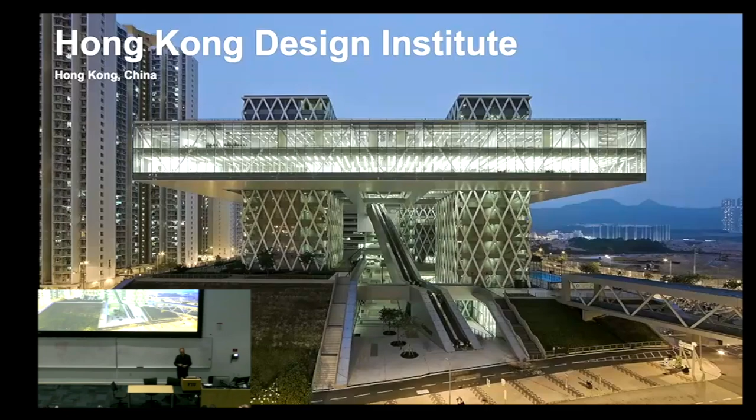They launched an international anonymous competition, which means that everybody can compete if you have the degree and your license, but it's open to the younger generation as well as some very mature firms that also like to compete on this very interesting project. As we were rather young and had nothing to lose and no fear in this first kind of big potential project, we were really interested in looking at the city fabric.

We looked at what makes Hong Kong a fascinating megalopolis, but also at some of the disadvantages or dysfunctions, to create a place that could be influenced by all those parameters.

Hong Kong is a very dense city, and in some parts also has a beautiful landscape around it. It also has a very interesting city fabric, which is very vertical, but also has some low-key pedestrian-feel architecture in some market areas. We felt that all those elements of space in Hong Kong are not really coming together—they are often in different parts.

We felt we should define a campus of design that should be influenced by some of the urban devices of Hong Kong, so it would feel like a Hong Kong building, but at the same time enrich it with what we can bring as architects to add more value.

Some of the ideas were, as I was saying, Hong Kong is a layered city. You have gardens, you have the cars—actually the level of the street is often for the cars, and there's another level above for the decks, which are sometimes the ground floor of vertical condo buildings. And then you have beautiful gardens in other parts of the city that are more like British-style design gardens, but not gardens that are really felt or used by the people.

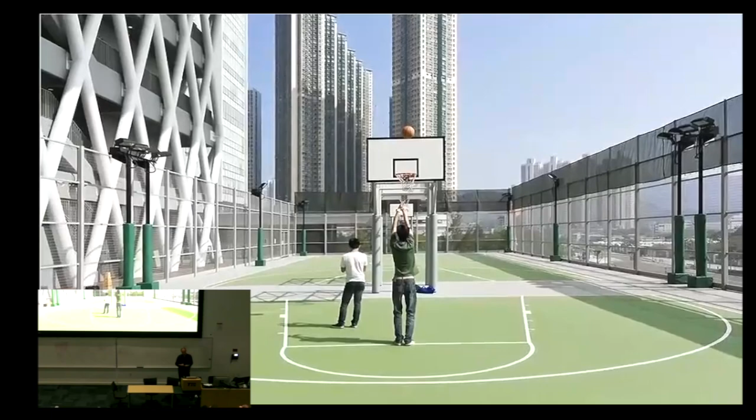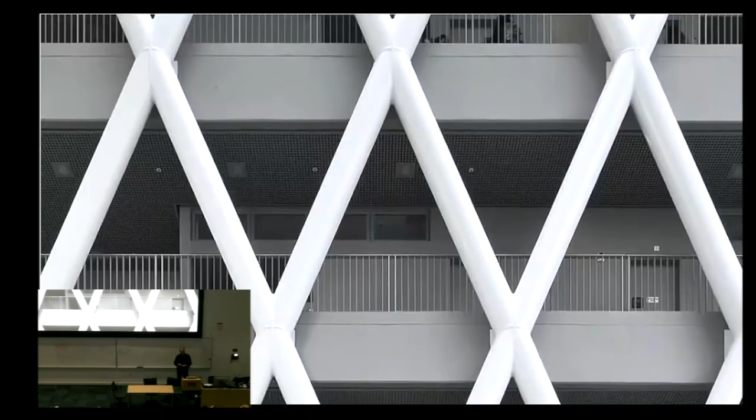And from this concept, this simple but quite universal idea, we transformed it into a building that became a kind of canvas for multiple situations. We started to introduce what we still believe today in 2025, which is a kind of motto in our research and our work: that cities need space for interaction, what we call social spaces, in order to provoke multiple encounters, provoke culture, provoke surprise, provoke the unexpected, but also a building that can relate to the city and be an extension of the city.

We believe that architecture should be influenced by urbanism more than the contrary, that urbanism is a place for architecture to interact with the past and the future.

So this building for us was the first attempt at creating a new place that feels like a Hong Kong place, that connects the different worlds of the city and nature into something more interweaved, not layered or stacked, but working together in a coexistent way, by introducing a garden that is not just a podium, but has a unique plaza with a center part that can be a place of encounters.

Then we like to play with movement in space, and we believe that stairs and lifts are also places of observation, places of encounters, places that should be used in a much more narrative way than just a functional way.

If you look at Hong Kong, which is a very hilly city, some parts of pedestrian displacement are made using those travelators that climb the hills. We played with that and implemented it into our building to create something that is a kind of hybrid of Hong Kong within it.

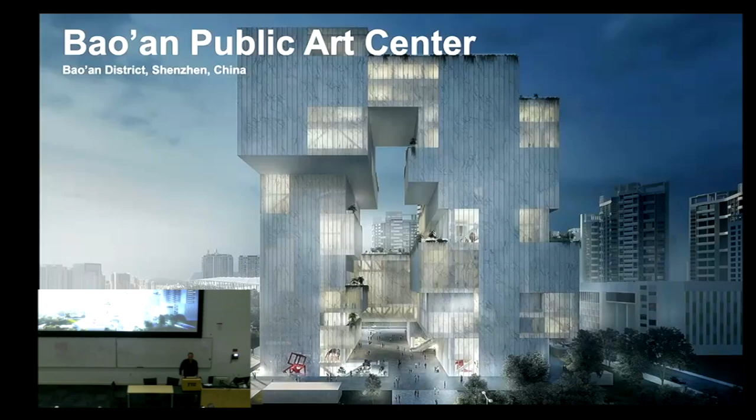To end a little bit about this first project, in summary, what was very rewarding to us is that last year Chanel, the French luxury brand, chose the building without knowing it was designed by French architects. That's not the purpose, but we were super happy to hear they selected it to do their latest fashion show, and to see how the building interacts with the city, because it is now an urban piece of Hong Kong, very vibrant, and after several years of occupation still becomes a place of destination that is more than just a building or a design school.

The next example I want to share with you is another cultural venue we have been designing, which we are going to complete in 2026. It's called the Bao'an Public Art Center.

It questions the idea of what a cultural institution should be in the future, something that is not an elitist place only for people who love going to museums, but also becomes a public place of interaction and multiple encounters. So it's almost maybe 8 years after we designed the first building, kind of a second extension or second part of this research into creating spaces that allow multiple activities.

As an architect, you don't choose your site, unlike in school where sometimes you can choose your land for a dream project. In the real world, you're given a situation that is often an open space left for public buildings to become a new addition, a new piece of equipment, a new infrastructure for a new district.

In this case, it's in Shenzhen city in China, in the district of Bao'an, which is a kind of recent district with a new airport. In China, they are fast-tracking the implementation of new cultural institution infrastructure to give civic places to the districts. But the question of what this kind of destination should be was raised to us.

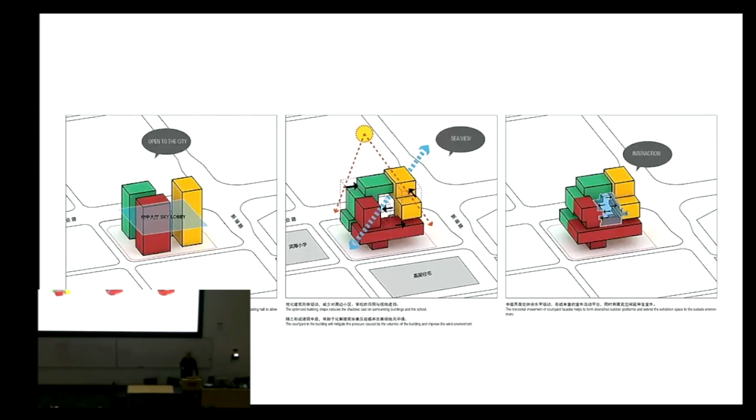So, for example, in this diagram, we chose not to stack or put the program side by side, but to use the site to give back some space that we're taking from the city, implementing a porous building with multiple layers of plaza and gardens that occur not only on the ground, but also on an elevated level, creating a kind of bridge in the district.

Those are pictures of the typical Shenzhen situation, a new city, 20 years old, very modern, very glassy, big, lots of cars, and how to create an institution in this kind of environment, where we learn at school that a cultural institution is a more weighty, heavier kind of building that sits in the city as a beautiful landmark, but also makes you feel the weight of the past, the weight of culture, which is really difficult to duplicate in a very new city like Shenzhen.

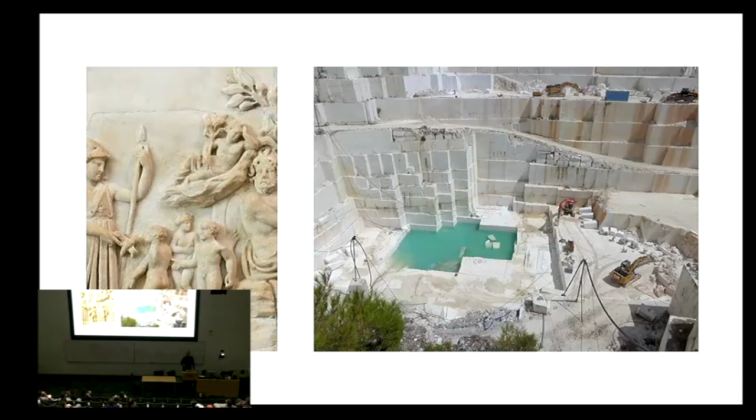But somehow that was kind of an inspiration for us, because we said, maybe we can do something new, something in between, not a pastiche, but something new which plays with those elements.

So we were influenced by the idea of quarries, marble quarries, thinking maybe we can do something that looks like stone but push it to another level, to carve the stone, to create a place of interaction where the city continues its journey through the building, and use another material, glass, to express new ways of working with the environment — opacity, semi-opacity, transparency.

And we turned this into the idea of creating a building that is not only not a frontier, but breaks the traditional enclosed museum typology to create an open dialogue with the city, making the building some kind of living organism, which we imagine like a carved marble block.

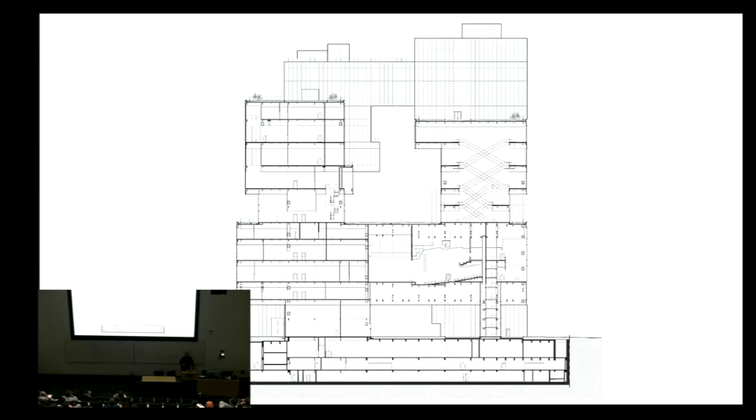So again, getting from the concept to the reality is a long journey, but it's something we strive for, to keep this big idea so people can buy into it and really feel belonging to it, enriching the city with those kinds of parameters.

This is allowing us to make architecture again much more than just a simple building or a beautiful piece of design, but allowing us to propose different ways of experiencing the city.

And again, you can see the place that we took from the city with this human plaza on the ground, becoming a city lounge with some trees.

We decided to elevate the access of the museum into what we call a sky lounge, a sky lobby. This allows people to go to different places in the building, so it looks really alive at different levels, not only as a typical typology where the ground floor is activated and sometimes a rooftop is the place everybody wants to go. We like to create something that is much more vibrant.

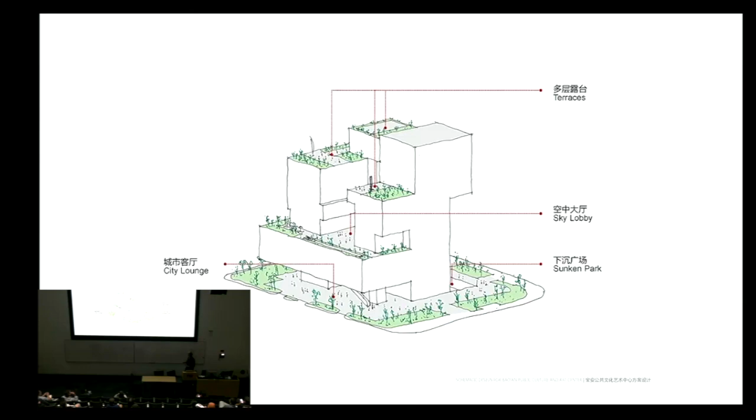So, going again from concept to reality, transforming this into a piece of architecture, a physical material, to make a glass building look like marble without doing a pastiche. We liked this idea because Shenzhen has a very glassy building, glassy atmosphere.

So we went to a marble quarry and took some photographs of it, mapped them, and enlarged the scale to make it adaptable to the size of the building.

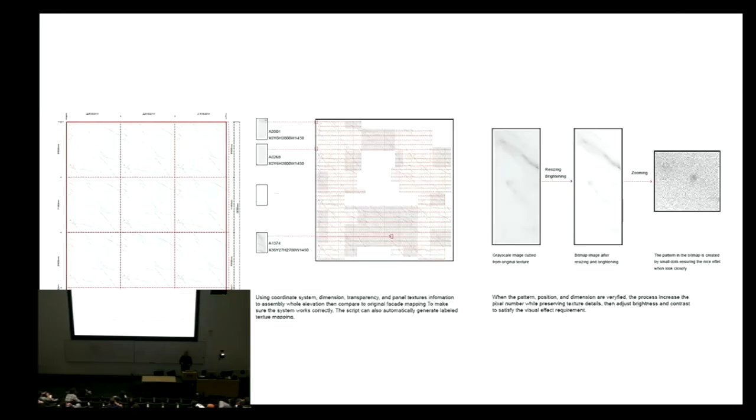And by doing this, we could push the idea of creating a pattern with a more sensitive look when you want transparency and opacity, which is actually very difficult to achieve with a piece of stone. Again, to enrich it, to make something that I think is also the beauty of architecture — that it can always experiment and create something.

You learn from what has been done. You try to create something new by learning from the past and trying to push a new idea.

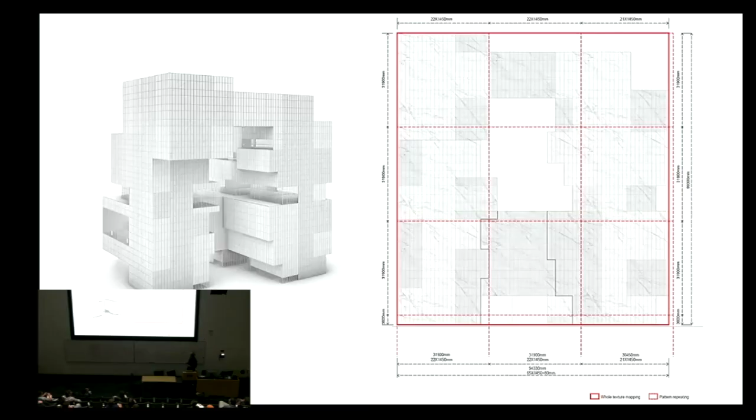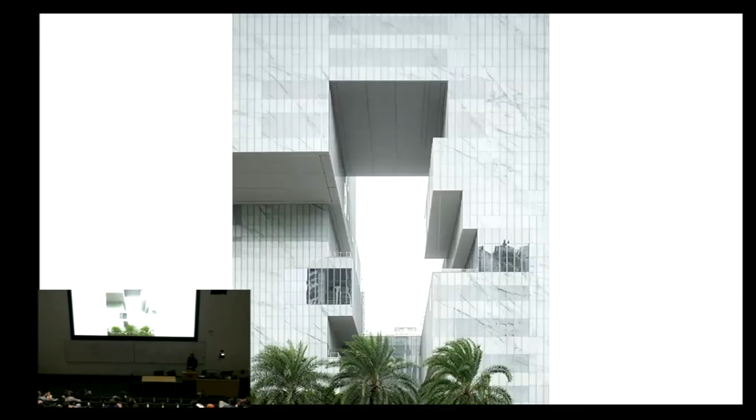In this particular case, we did all this research and finally found the right scale so we can read the veins that you cannot read at the scale of such a huge building, but also allow the transparency we were looking for, to see people in the building and not people behind a wall. Those are pictures of the facade being completed, dated three weeks ago.

The building starts to create this kind of original pattern in the city, a sculptural building, but in a way with a purpose. It's not a sculpture for the sculpture's sake—it's for getting the lighting, getting multiple terraces, and creating a destination that is very alive and very sensitive to its environment.

You can see in the transparent parts there will be the theater, shared by the city or used by the city for plays and performances. Here is the building as it is today, and in the next months we will have the landscape starting to climb and inhabit all the multiple terraces that you can see here on the volumetric.

Next project is one we won about... 20 minutes, Adrien. I'm already at 20 minutes. Is it okay?

The next one I want to share is also very interesting because it's very different again, and that's what I like to share with the School of Architecture—that in the different patterns or different cultures of the city, you can create your path through to invent something exciting, or at least we attempt to.

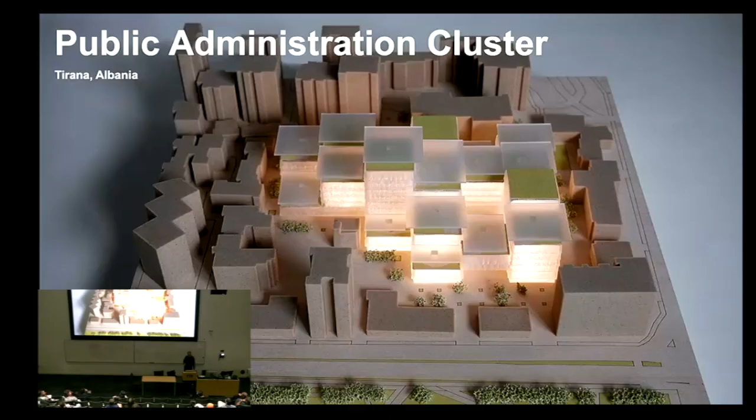This is a public administration center cluster—a government building for the city of Tirana in Albania. It was a big international competition, and maybe what is particular about Tirana is that it's a booming city, a booming country.

But with a very strong political statement that architecture and culture should be an anchor point of the future of society for Albanians, for everything they have lived through. He really believes in it, and he likes architecture to push ideas.

In our case, the site for this government building is in a very dense situation of Tirana, and quite chaotic—a lot of cars, noisy. Buildings are very free, and it has a certain beauty, but at the same time, the city needs a certain clarity, less cars, and more place for pedestrians and social interactions.

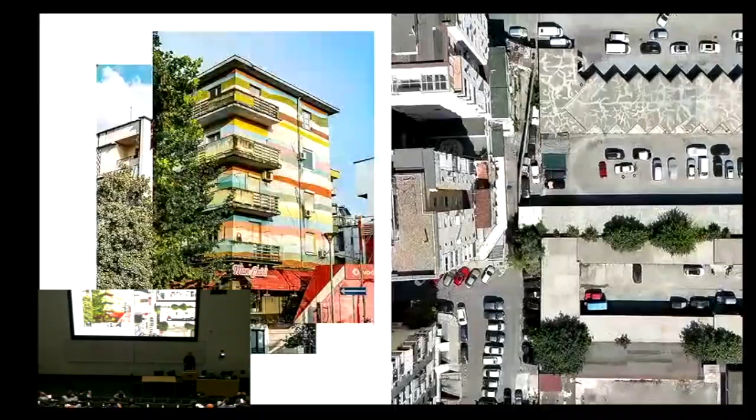So it was our first project in Tirana, and the Prime Minister said to the architect, please do a building that you wouldn't do somewhere else. You would do a building that relates to the city fabric.

I don't want something that you have done somewhere else. I don't want international architecture—of course all the architects are contemporary architects, but we have to learn from what we see and enrich it somehow.

So there is a strong pattern, which is interesting. There is a strong freedom because in recent years, people were allowed to build without any rules. So you find in the streets balconies, extensions, creating this kind of a very fun fabric.

At the same time, you have a lot of colors, street art that the government was also pushing for, to bring color into the city because it was so dark from its history. And then you have some craftsmanship, as we have in all our countries, but that you can really feel when you walk in the city.

So as architects we try to use a few things and push them in a very direct way, because you cannot have too many ideas—you have to choose the battles. For us, the city is an inspiration, and the natural environment, of course, is an inspiration.

And the colors that we found are also something that, even though we are not super used to using color in architecture, we said maybe this could be a first time we try. But we don't want to do it alone—we want to work with a contemporary artist.

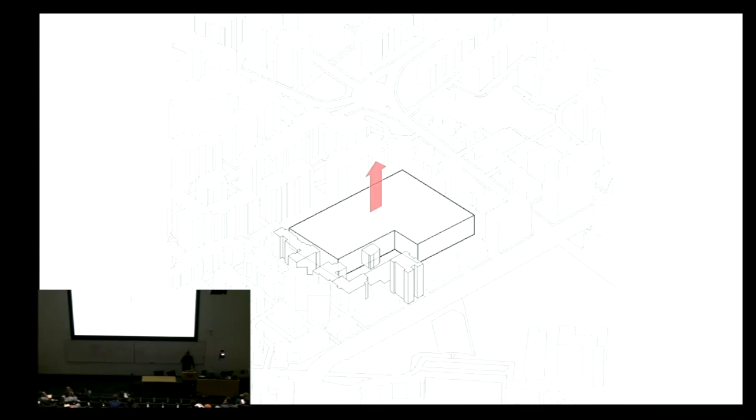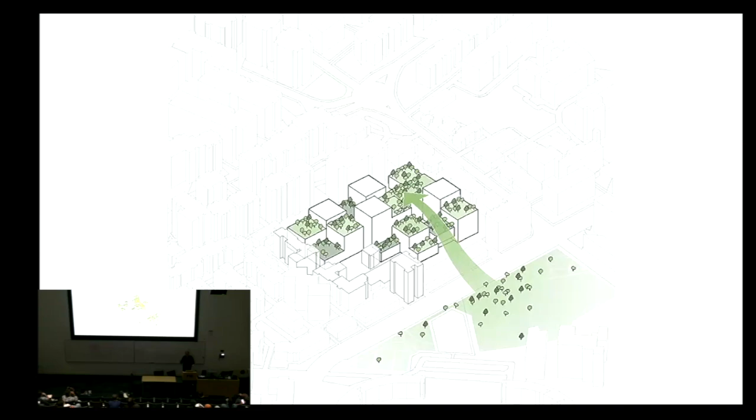So we started to extrude the block in a very simple manner. And then, because there is some green also around with a stadium on the other side, and the climate in Tirana is very hot, everybody wants to protect from the sun. We said nature and shade are going to be our friends, to create small gardens on a small scale, like pocket gardens, but also playing with the height of the building, not making one big building, but more like an assemblage, like a village of smaller buildings. We are going to create a kind of new fabric which is much more human and more inviting.

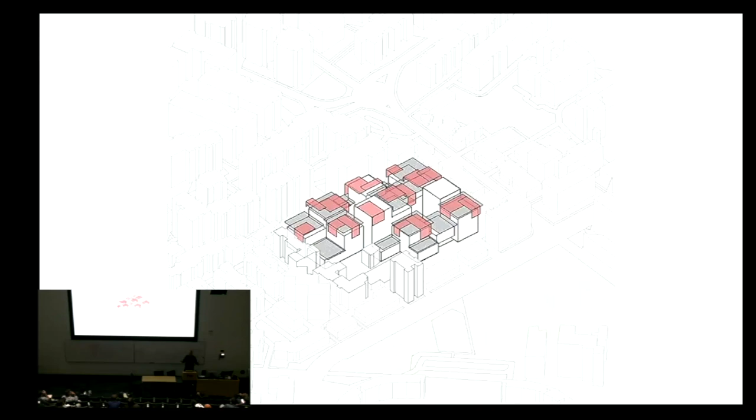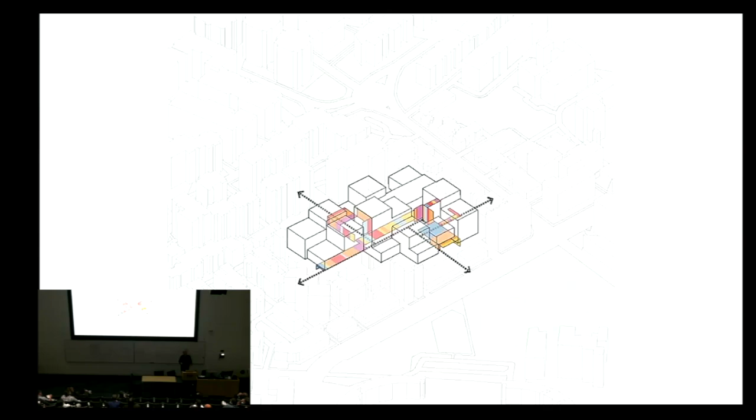And then we asked the artist, what would you do? And he said, well, what I can do is work with a new material he was using - it's acrylic rods, very funny, looking almost like candy. And he said, we can help you use that as a kind of wayfinding, or a cultural way to make your building more appropriate - or not more appropriate, but somehow give a cultural aspect to the building in a contemporary manner. So it's kind of those artistic carpets that wrap the building in many ways, and it becomes something that belongs to the building, and also a kind of wayfinding to define the pattern of the internal courtyard and bring this into reality.

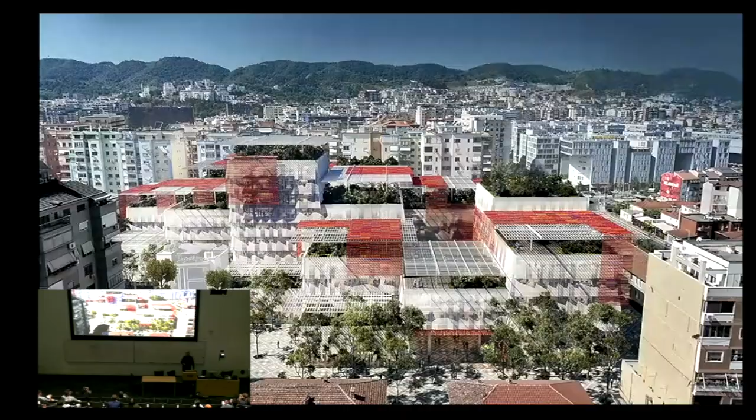Well, this is a picture of the final design that was awarded, where you see again no cars, but more like a human fabric with open patios, an invitation for people to get in, but always protected in a nice, cool kind of atmosphere, to have the breeze of the city and the shade of the city, and the color that gives this kind of sense of identity. So it's kind of the unifying thread of the project.

And then again, looking at this, of course in architecture, according to the facade, you learn how to protect yourself. You can use shade, you can use rods, you can use a horizontal line or vertical lines. And we said, maybe we can do something more playful. Looking at the skirts of these old traditional clothes, we made something that will protect the building with an aluminium kind of curtain protection.

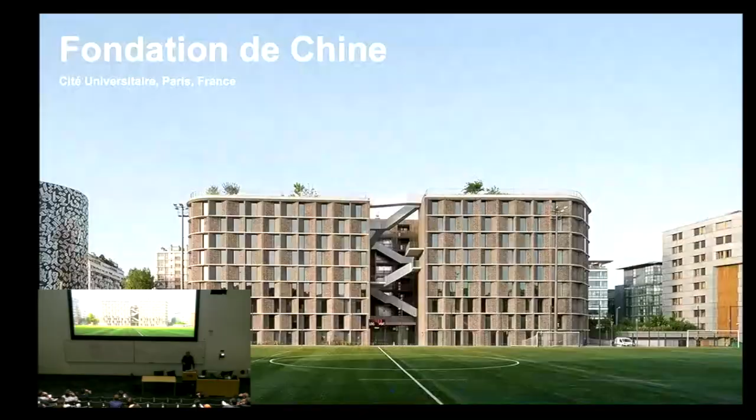Fondation de Chine. I will go much faster now.

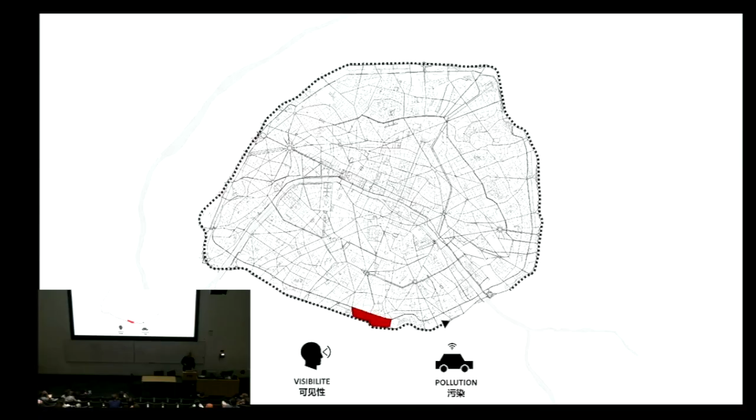Fondation de Chine - it's a residential project we did in Paris, which is kind of a dorm. In Paris, we don't have campuses like you guys have in the US. There's only one, created after World War, at the edge of Paris, which has the advantage of being very visible because it's on the ring highway of Paris, but the disadvantage of being a bit apart, with a lot of noise and a lot of pollution.

And every country has a pavilion, and some countries don't have one. We wanted to propose one, and China didn't have one. So they launched a competition, and we said, how can we create residential buildings that have a feel of Paris but will also welcome Chinese students. And also the investor is Chinese, so he wants his building in Paris to somehow represent the Chinese identity.

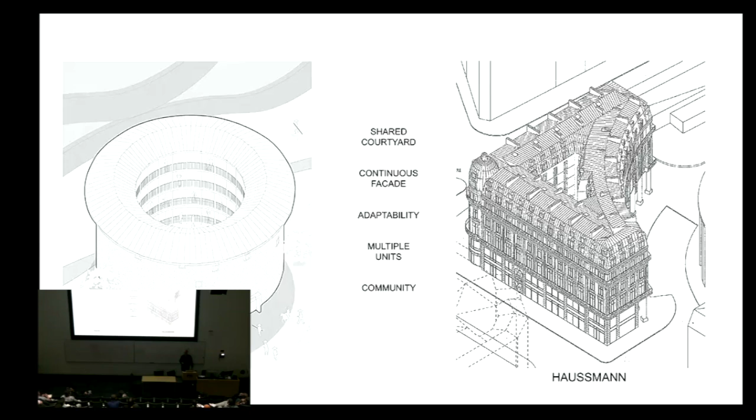So we looked at some typology of Haussmann buildings, which have some character and also a little patio, and an old traditional Tulou system in China, which has a communal space but a protective skin around it to protect yourself from battles. And we invented our own kind of fusion of these two typologies, by creating something that pushes further this idea of courtyard architecture, but open to the land and to the landscape, because we want more interaction, more generosity - we want the landscape to be not a place for aesthetics, but a place really to live, to feel the nature in, and to enrich your daily life.

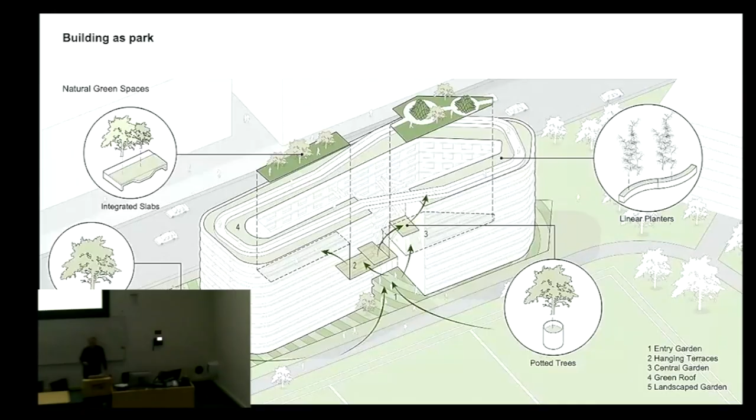So in the end, we let the nature in, and we decided that this internal courtyard will be a place of visible interaction for students to connect to themselves to each other. We invented this kind of external stair that becomes a link between the student rooms, giving access to the public amenities on the ground floor, and also going up to a roof garden.

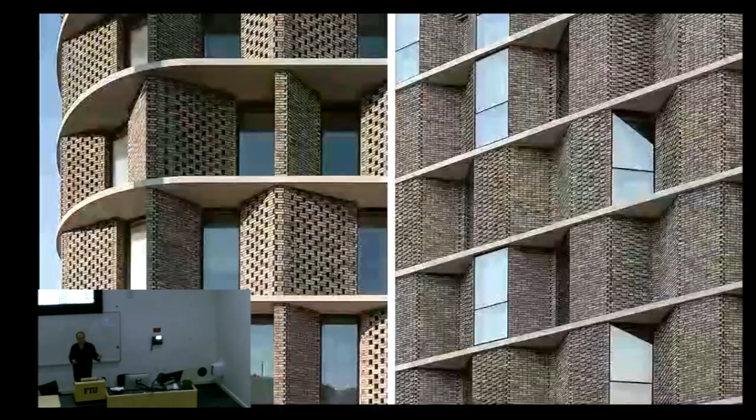And then for the building skin, we use brick because it's a kind of material that is also a bridge between China and France, used in a domestic way. And as you can see inside, we have a warmer material, which is wood, giving this feel of being in a cocoon place, some place where you feel better.

And I will finish by showing this project, but just because Henry asked me to talk about Tropicalia, and it's really another kind of typology. It's been 10 years we've worked on this project. This is a tropical greenhouse, and it's in the north part of France, so it's kind of an awkward situation to do a tropical space there.

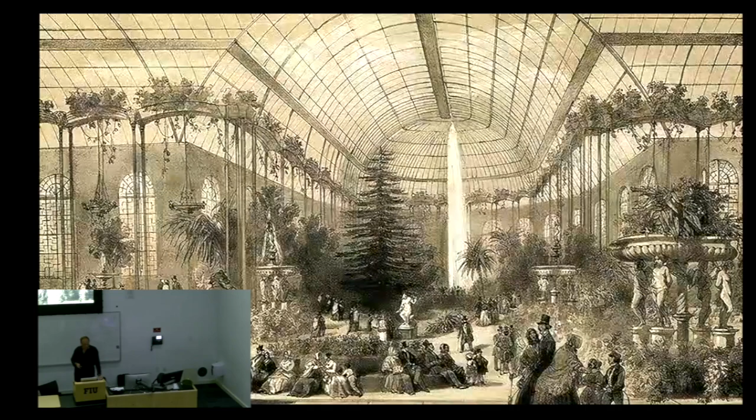So what we wanted to do, because this project aims to be an immersion in the fauna and flora, is a destination for research, but also a destination for tourism, and a destination with connections to some countries in Africa or South America, to exchange ideas and make sure people are aware—if they cannot travel and take a plane to go there, maybe they can learn about the spaces.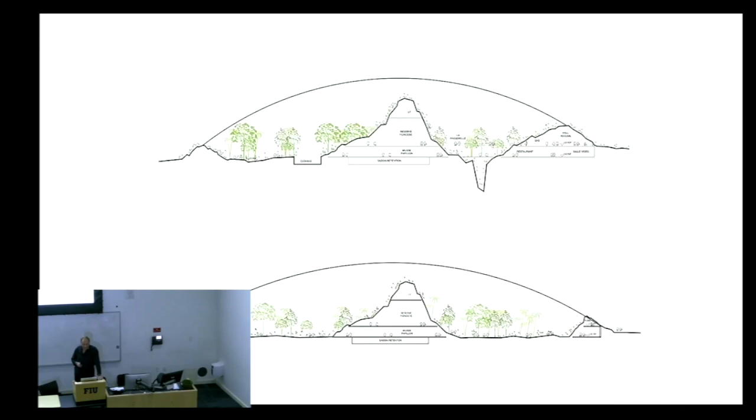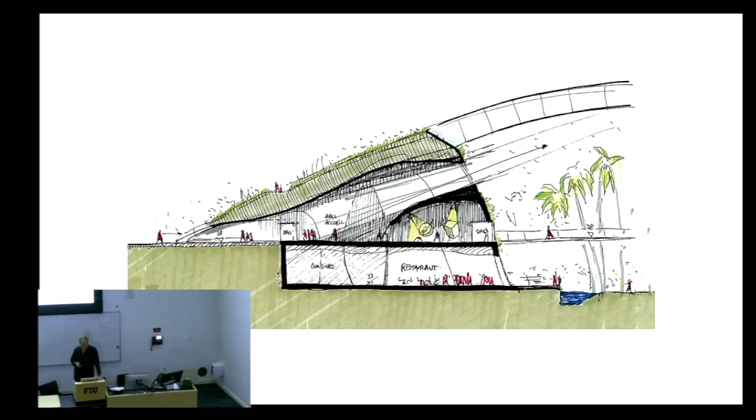So we designed a project that is an extension of a small hill, a piece of nature with a global dome, surrounded by a small ring where we decided to put all the facilities and rooms needed for research, or theaters like here to learn, and to use this little hill to create an extension of the land for people to interact with the outdoor space.

And inside we have this wild system that has a certain beauty, but at the same time can be fragile and needs very high temperature, because the north part of France is not Amazonia. Then there was a debate about architecture—are we really going to consume a lot of energy to do that, because we don't want to do that anymore? So how can we make an architecture that can produce energy?

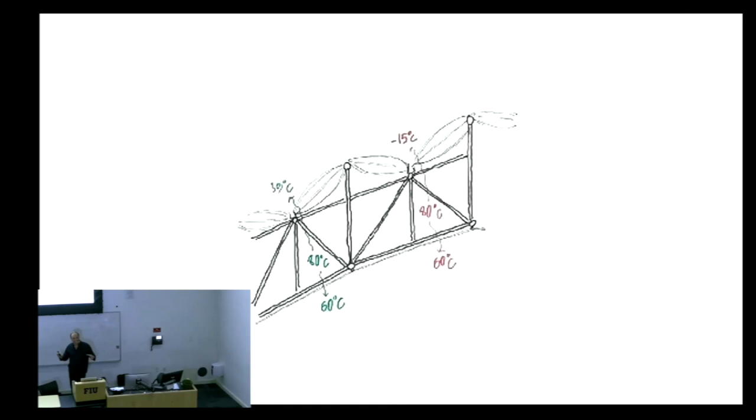So we decided to work on a scheme, a sample, a research about creating a dome that is kind of a giant heater by encapsulating all the steel structure into a double layer of ETFE. The first layer—it's not glass, it's cushions of air. Then we have about a 3-meter gap, and below that another layer of ETFE, almost like an air chamber of a bike, where all the air is heated by the sun throughout the year.

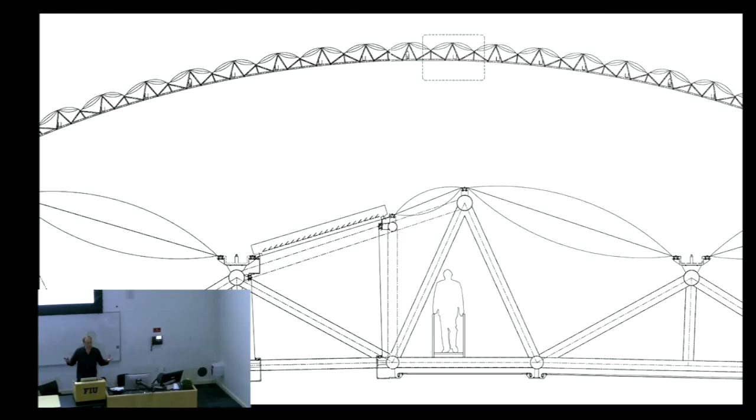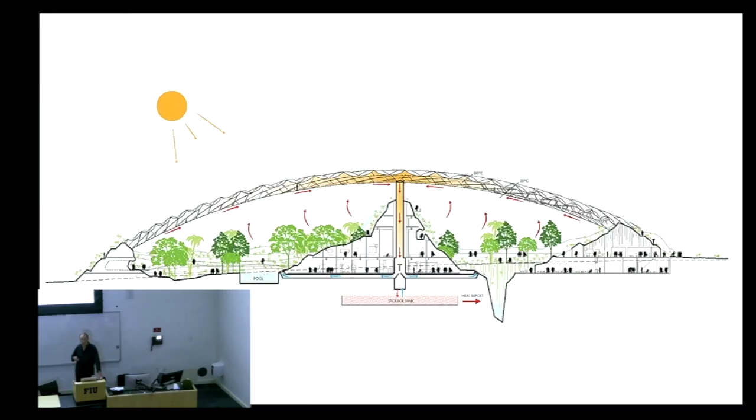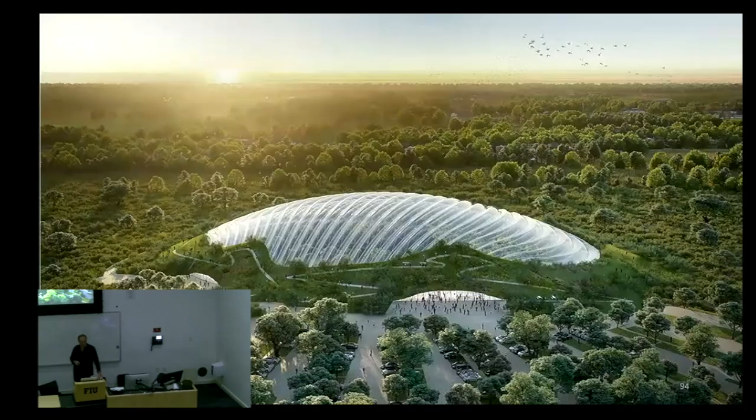So that's the way the project got approved. Besides being a destination, it becomes something else—a place of production, creating new values, enriching the environment, and bringing new energy into potential neighborhood buildings.

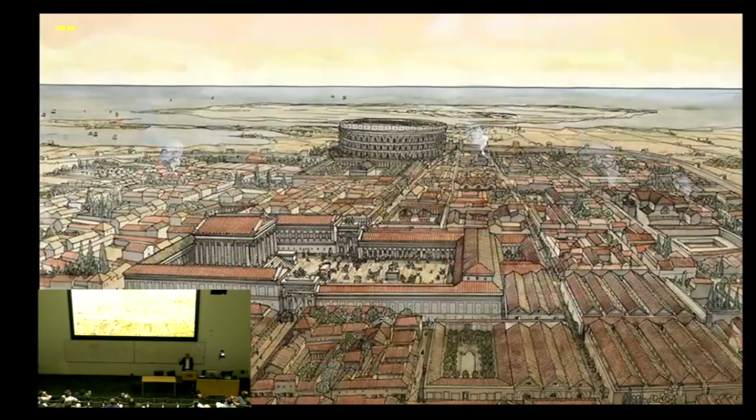So let's go out of where we are, up, and let's go elsewhere. So we're leaving Florida and we're going to south of France, Narbonne. Narbonne was actually the capital of the Roman Empire when they arrived in French Gallic antiquity. This created probably one of the largest capitals ever outside of Italy, incredibly big, with capitals, with Colosseum, with arenas and everything. Except it was very pagan, because it was the oldest one. So with the Christianization of the Roman Empire, they started destroying everything, and eventually the city was completely destroyed.

And they used the stone very much as the quarry that Thomas was showing you. They used the stone and they built the city walls. And in the 19th century, we happily dynamited all these city walls because of the cars and the trains and the roads. And some crazy archaeologists saved about 1,200 stones of a ton each and stacked them in a desacralized church. And there was an international competition that we did with Norman Foster and Partners, the British architectural practice, which I'm sure you know.

They built a few things here too. And the competition was about creating a museum that would host this collection, and in addition also host some frescoes and villa discoveries, archaeological site, and the nautical port that had been excavated. And the problem is, how do you showcase fragments? How do you actually convey the monumentality to which those stones have belonged in a museum where you just have fragments, stones?

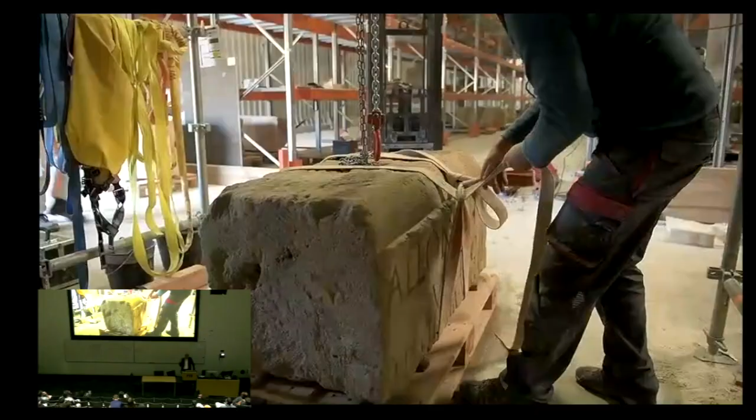And that was probably the spark of the project, because when I went to visit the church and saw all the stones being dismantled and organized, I was thinking that maybe the brief, the program we had received, was not the right one. They asked for 1,200 square meters, about 12,000 square feet of storage, where most of those stones would be stored and hidden from the public, while they would showcase few of them in the permanent galleries. And that seemed to me very awkward, to take those stones that had been in a church for 120 years and hide them from the public with a new museum.

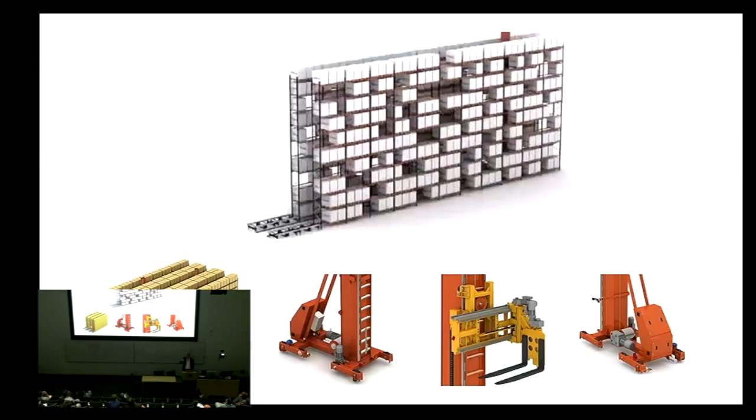So again, thinking about what those fragments are, I started thinking about fragments itself. A fragment is a part of something more. It's just a pixel, like a pixel in an image. So instead of creating a horizontal, huge storage of 1,200 square meters, why don't we create a storage which is vertical, which is going to almost be able to evoke the idea or the remembrance of the city walls and of the palaces to which they belonged.

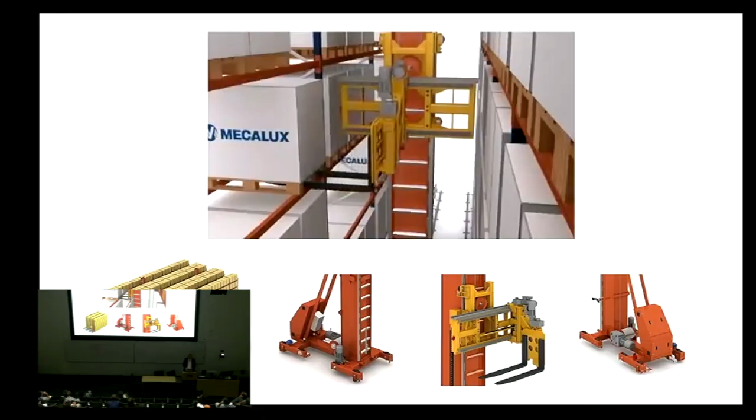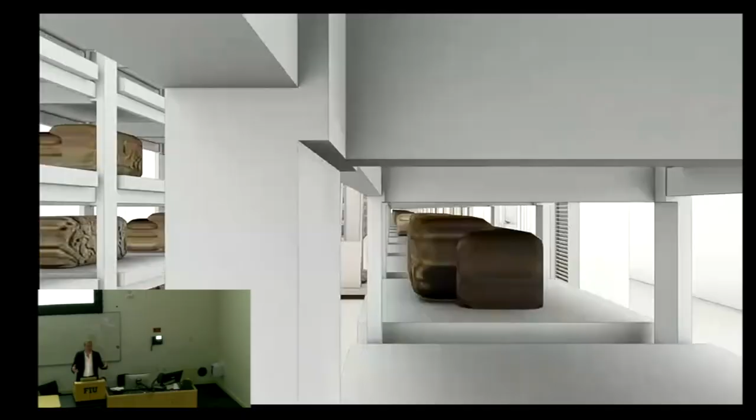And so we started thinking that actually we could do a glyptothèque. A glyptothèque is like a library of stone. And we thought that we could do a mechanical, dynamic, useful, alive storage that would be permanently alive and changing and moving, which is, of course, quite paradoxical for a museum where normally you do not move the artworks.

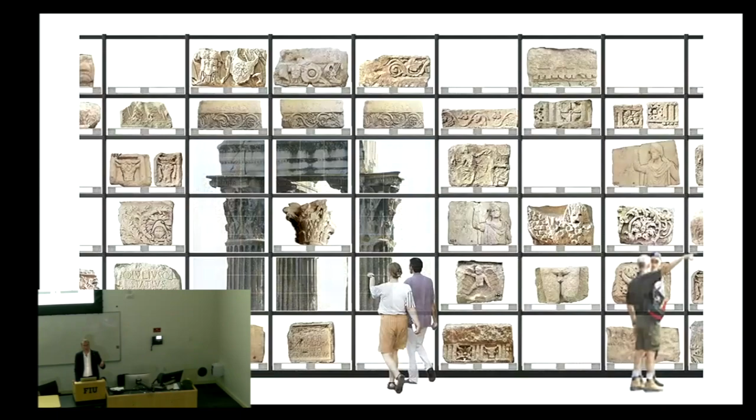But it became also a kind of visual identity for the museum and an opportunity to recreate entirely the palace system, but also embed multimedia. Instead of having a film attached to a stone that everyone gets bored of after 6 months because they've all seen it, we started thinking that if you have a bookshelf, we could do almost like a publishing house and create different content for different stones.

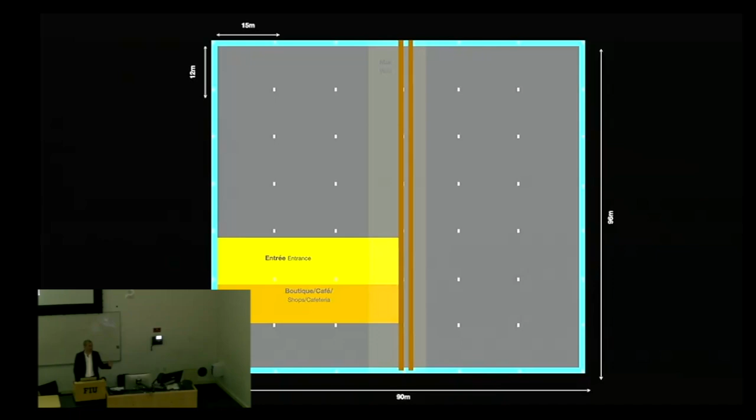When the museum opened, we had 20 stones illustrated, but there are 1,180 stones to illustrate, so they have years of programming for this content. The idea totally enthused the architect, who made it the backbone and the spine of the project. It became the frontier between the public spaces and the professional spaces, with the entrance, bar, cafe, permanent galleries, auditoriums, and temporary galleries on one hand.

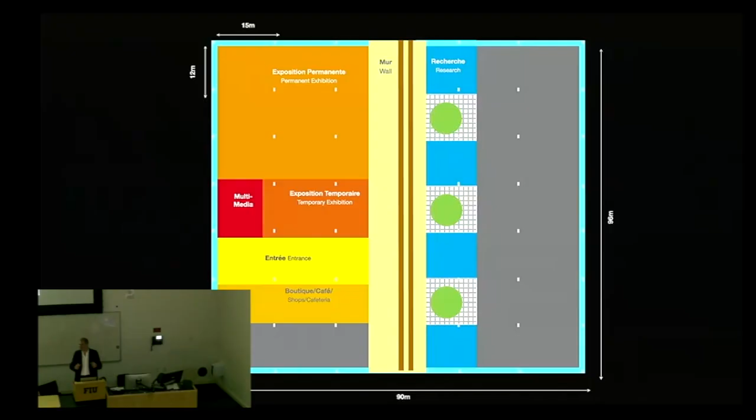On the other hand, you'd have atriums, labs, research, and the rest of the storage, which was much, much smaller. So we gained space by creating this quite crazy 75-meter long, 12-meter high, double-faced wall, which hosted about 800 stones and became almost a piazza, a public space—very much like the one Thomas was showing us in Hong Kong, where suddenly the artifact becomes a place of gathering and understanding, almost intuitively. You don't need to explain anything to understand that.

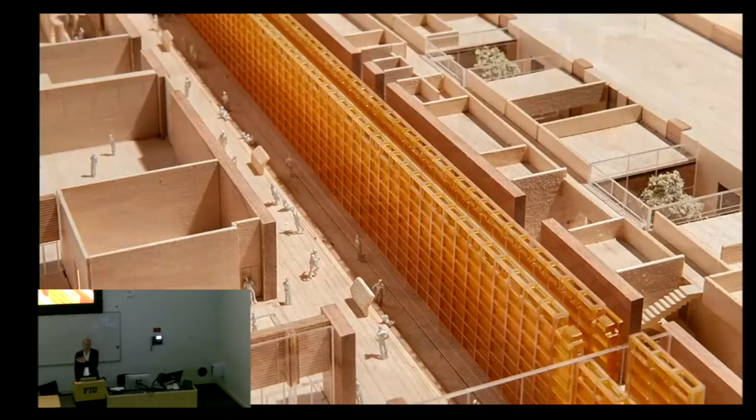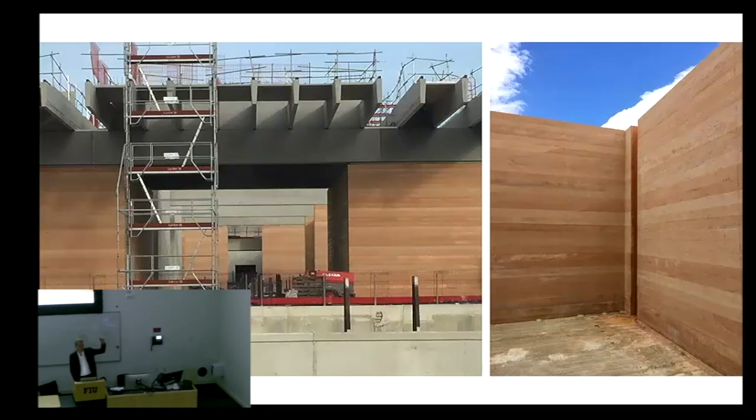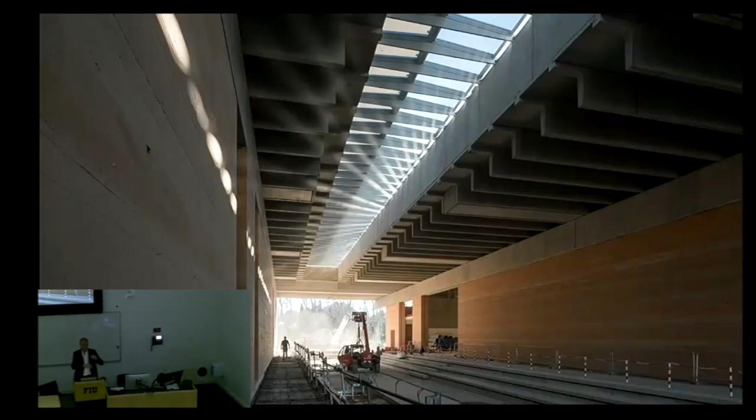Then we worked with the architects on the nature of the wall, which is rammed earth—insulated rammed earth concrete in a way—with prefab beams on top. That's the beast under construction. It's actually two buildings meeting at the point of the bookshelf, because the foundations of the bookshelf are extremely important—it's about 800 tons of bookshelf, so it's really heavy.

It took us about 10 years to do this project from A to Z, and this is when we opened the museum. There are a lot of references also to Roman architecture, with impluviums, atriums, and peristyles.

And this is my baby—the big baby. This is no CGI, these are real photos. What I like about it is that you don't need labels, you don't need text, you don't need to know anything to understand what those stones could have belonged to, be it the city walls or the monuments the city walls were made of.

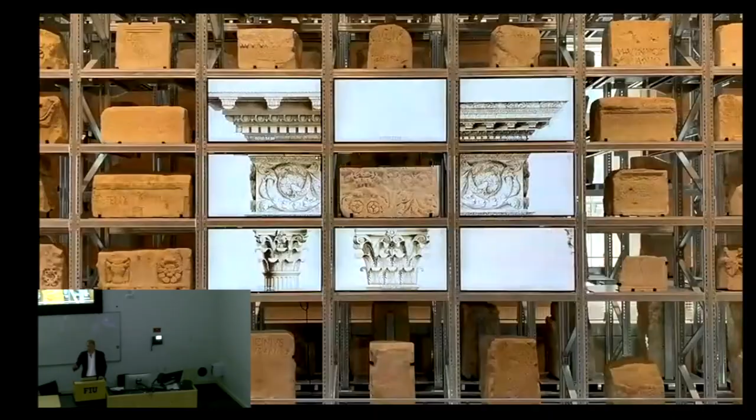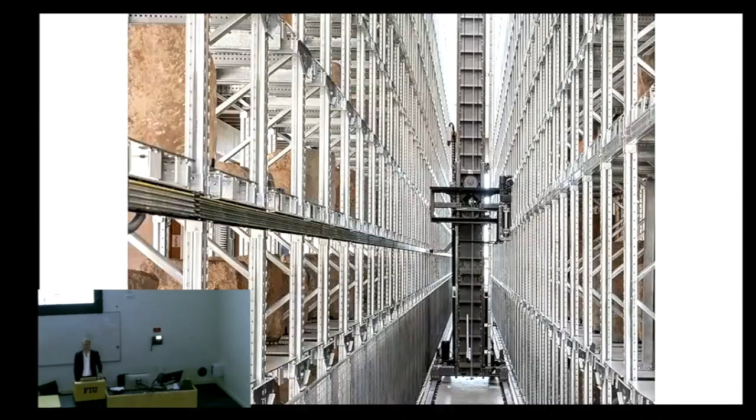The machine brings a stone, starts a little movie, and so forth. Every 15 minutes, the machine displaces and reorganizes the whole wall. Then you have the zenithal light—that's the machine, it's called a transtocker, like a forklift on a ladder in a way. And of course there's also the permanent galleries with their multimedia immersive spaces.

One very interesting element is that we have the same skin outside and inside, so there's no materiality—it's not a white box, not a volume exogenous to the rest of the architecture. It's the same, just a very simple building: rammed earth wall, prefab concrete, and all the metalwork.

I'm really convinced that a museum, an architecture, or a display is really about how you convey the narrative—how you make it understandable to everyone, whatever their background, knowledge, path, or culture, and how you make them weave their own story with their feet, their body, as they move.

This is funny because this is my Richard Long moment somehow—I don't know if you know Richard Long, or you should. He's an important English landscape and land art artist who made those kinds of accumulations of stones. Actually, this one was a natural one we found on site at an archaeological site.

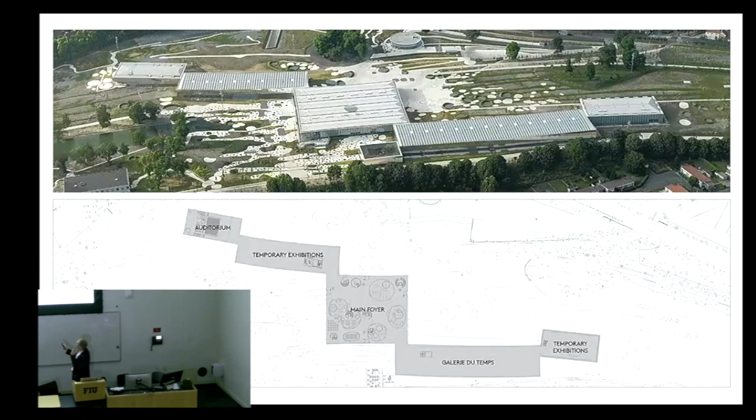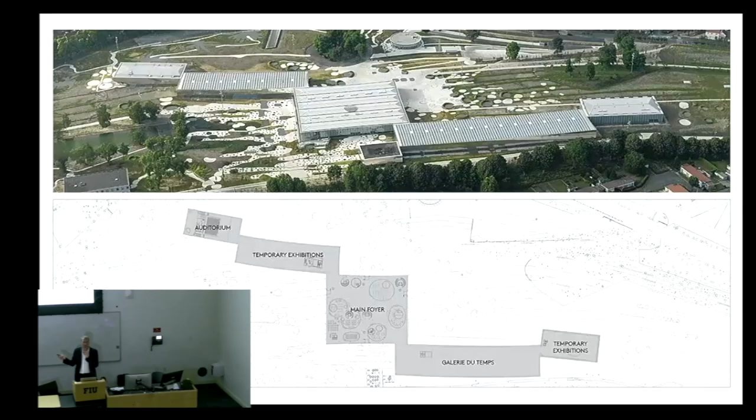And then you have temporary exhibitions, an auditorium, and the permanent galleries. When I started working on the project, SANAA had designed this gallery, which is extraordinary in length - we're talking 125 meters long, 25 meters wide, 3,000 square meters. That's about 32,000 square feet - a football field in length and half in width. It's pretty massive, very massive.

The first issue I saw was, how do you make people feel comfortable and at ease entering such a huge space? It's not easy, especially because the height and floor level of the foyer was much higher than the gallery itself, and then we had a 0.3% slope because we needed ceiling height. So we dug into the topography to get that ceiling height. And Sejima had designed this kind of dropping, like a volcano lava.

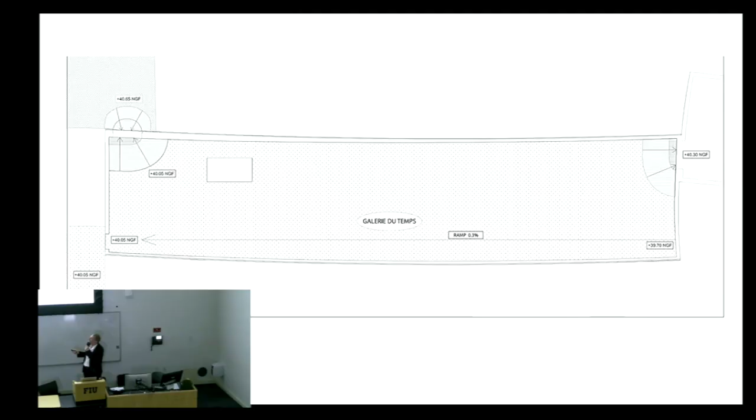I thought it was going to generate confusion. People would be lost, coming in, scattered away, not understanding what space they entered. So I suggested instead to create a terrace that would be at the same level as the foyer, so that people, when they arrive, actually dominate the gallery.

Which is absolutely, radically, totally in reverse of any museum institution. If you go to the Met, you got to go up a flight of stairs, enter the big door, have a vestibule, and then another flight of stairs, so you really feel the culture looking down onto you, because it is not for you. Well, here it was all the contrary.

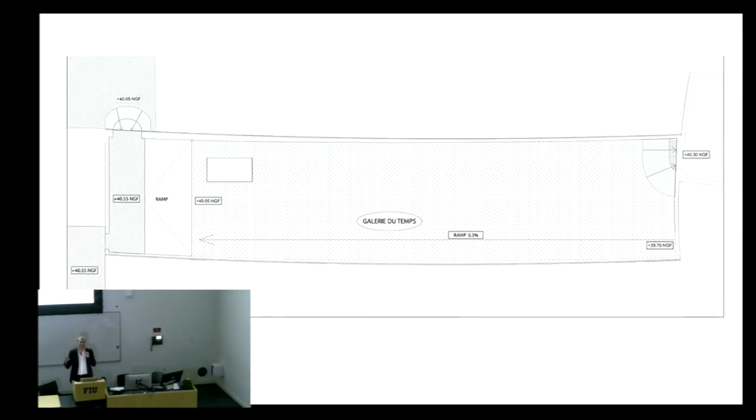How do you make people feel, in a way, that they dominate, and you say, oh, I'm going to go down the Nile, I'm going to go down the Euphrates, I'm going to go down the Mediterranean Sea, because the gallery was going to host all these ambassadors of the Louvre collection, ranging from around 3,000 BC up to the mid-19th century. So we worked on the collections, schemed the art, worked on aggregates of territories and civilization, and how we could work with the different elements together.

Another thing I was convinced of is I didn't want anything on the walls. Because if I had anything on the walls, I would have needed to partition them—you can't have paintings for 125 meters long, it's awful. So I didn't want to partition the space; I decided to have everything in space, so everything would be in dialogue, in perspective, so you could see things in space and not along the wall, which is another big museum fatigue. You go wall, art, label, wall, art, label, wall, art, label, window, you jump.

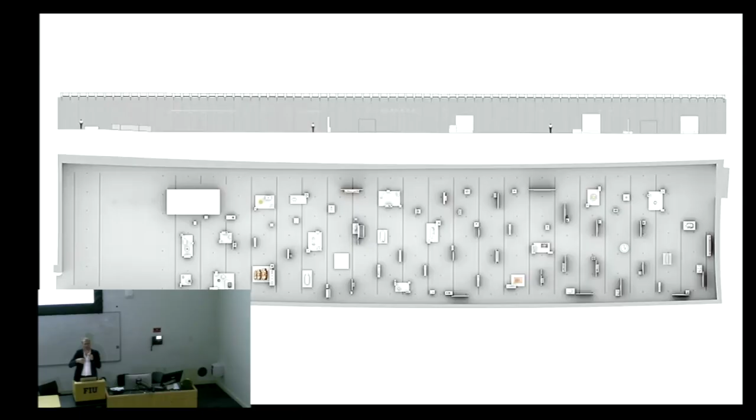So really here, on the contrary, it was all about creating this kind of flow of the public. Then Sejima said to me, well, if you're not putting anything on the walls, we're going to make sure no one ever puts something on the walls. And we cladded the walls with the same frosted aluminium that was used outdoors, which, by the way, OMA just did in Torino for the Egyptian museum he renovated.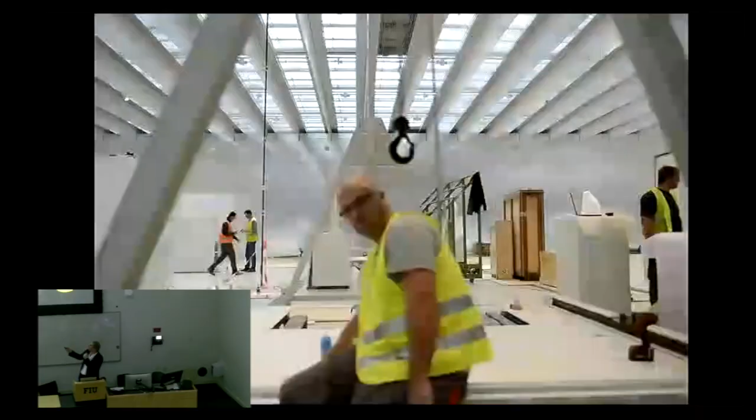So the only thing we had was this timeline, which gives you a sense of where you are. And this is a space—you can see it's pretty massive. This is a time lapse, but it's a bit long, so I'll get through it. That's the installation of both the artworks and the cladding of the aluminium walls.

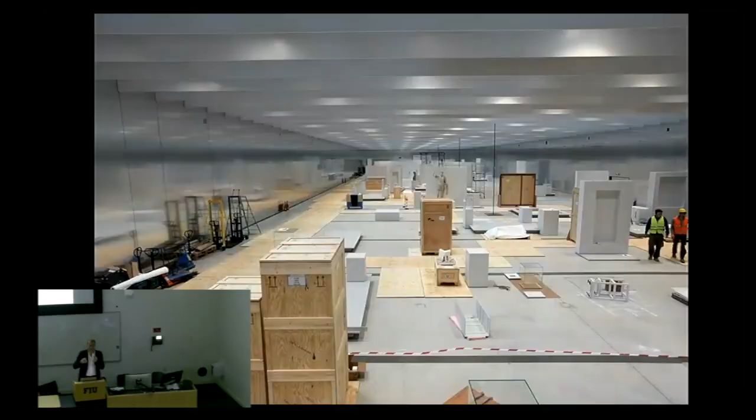And oddly enough, it's all about putting all the artifacts and all the selections of the artifacts. We started with 800, we ended up with 250. It was about making sure they would make sense and that people could weave the understanding by themselves.

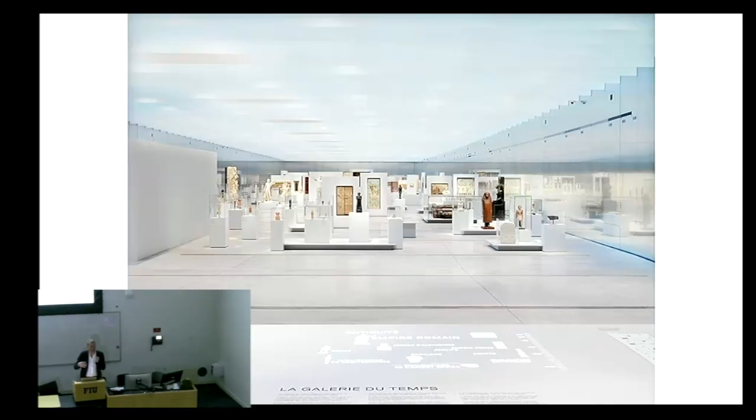In a way, you empower people. You're not telling them, here is all what you don't know and should have known if you had your diploma and read all the books, and then good luck understanding what you're going to see. No, we wanted, on the contrary, to say: come, step in, get down, move around, circulate, weave, throw bridges, build connections—even if they're wrong, it doesn't matter. And generate the meaning by yourself.

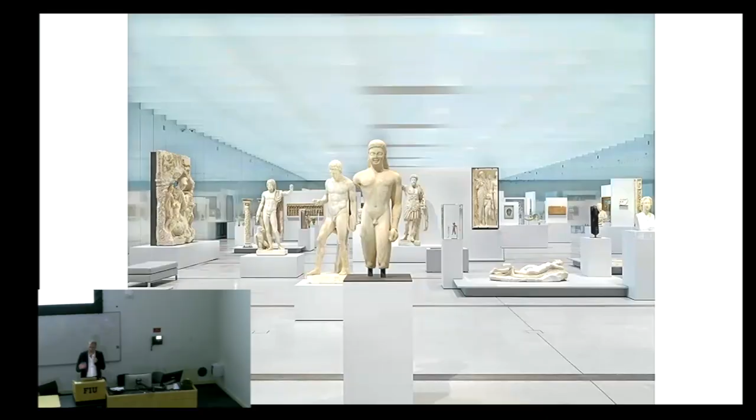And then once you've hooked people like that, well, then you have them. For example, here, the Kouros, the Discophore, and the Jupiter are different scale, but there's one point with the perspective, and it's almost an anamorphosis, so you have the feeling they're all the same size.

The museum became the most visited museum outside of Paris the very year it opened, and remained so for 12 years, with an average of about 500 to 600,000 visitors a year.

I just show you a bit of moving image because it says a lot when you can see both the architecture but also the movement of the public inside the museum itself.

The architecture is stunning, and the SANAA, they are incredible. The funny thing is that most of the curators and conservators of the Louvre thought that the artworks were closer to the public and that they were more endangered. But in reality, there's far more spacing and far more distance and far more protection.

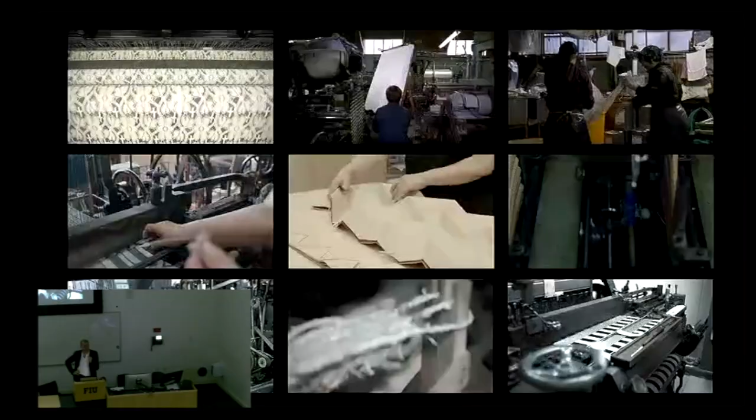Maybe then at another scale, very different, I'm going to bring you to another part, which is in Japan. There I worked with Reiko Sudo. She's a textile designer, probably one of the most cutting-edge textile designers in Japan, working with 60 different mills throughout Japan. Her textiles are gorgeous. This is one of hers.

They're gorgeous, they're incredible. But the problem is that exhibiting textile is the most boring thing on earth. It's dead, you can't touch it, it's not moving. It should be worn, it should be moving. And it's just there, like little samples, and it's very, very boring.

So I wanted to try to find a solution to make the textile move without having to create something that moves. There's a very strong tradition in Japan called the koinobori. These are flying socks, with the wind. They're very auspicious, used in May for announcing the birth of young boys. They're super important, and very, very profoundly Japanese.

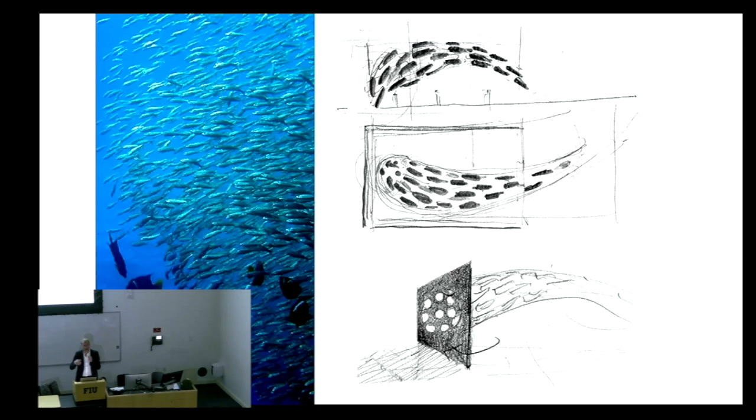I thought of them, and I thought of murmurations, schools of fish, murmurations of birds. When you see those, you see movement, you can't help it. It's just like an incomplete process. There's a capacity here to evoke movement, even if it's still. So what we did is we designed a kind of super designy koinobori.

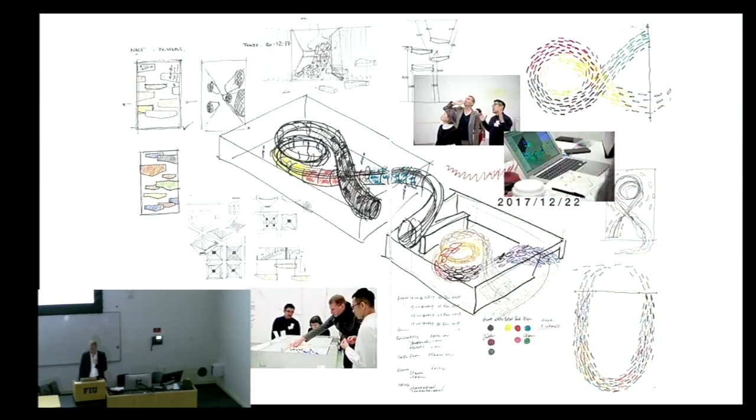And we started imagining a huge school of fish that would display and showcase all the textiles of Reiko. So we did some trials and tentative attempts with Reiko - that's Reiko - and that's Saito-san, with whom we worked, trying to think how we could create movement even though it is static.

So eventually we installed many of those. It took us about 10 days to install them all. It was quite crazy because there was a lot of strings, lots of strings. And this is probably the most visited sock exhibition ever. We had 100,000 visitors coming just to look at flying socks.

But it did work. People would come and spend the whole day there. We had music created by Minami-san from Kyoto, and people would just sit there in this twirling, instantaneous, frozen movement of fish and of her textiles. Since then, we've been working with Reiko on many of her installations throughout the world.

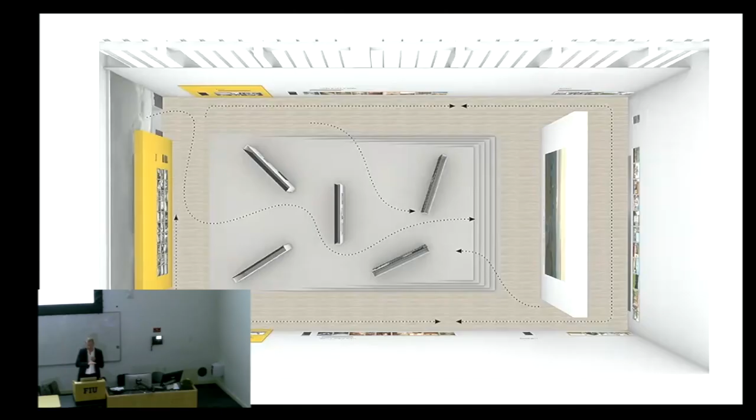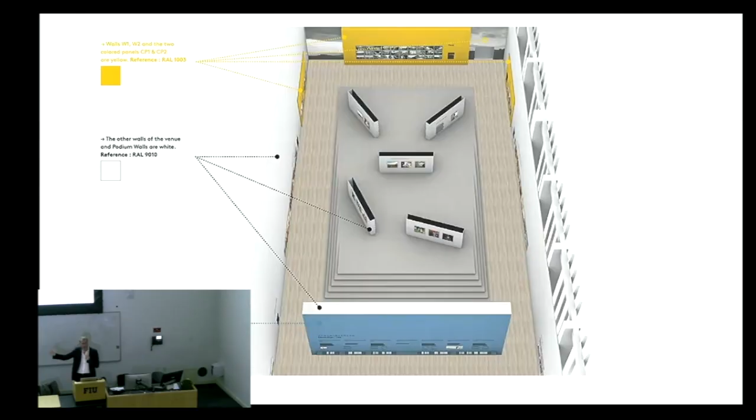We thought that maybe we could create a kind of slope, a hill that would raise people, bring them to a height where then we would have all the stairs and all the sitting area that would allow you to contemplate the whole movie. So we tried with these LED panels, super high definition, just like you can find only in China.

Does it work? It doesn't work this way. Yes, this is working. So we had these huge panels with extracts of the roads and extracts of the movie.

There was a kind of blending of the moving image and the still image, the photography and the extract of the movie. In a way, we were almost inviting people to meander through some extracts of the movie, some of those roads, as they would climb up that hill.

But that hill, in order to not have any handrails or anything, was surrounded by those stairs, and those stairs were becoming the gradins on which the public could sit and watch the whole movie.

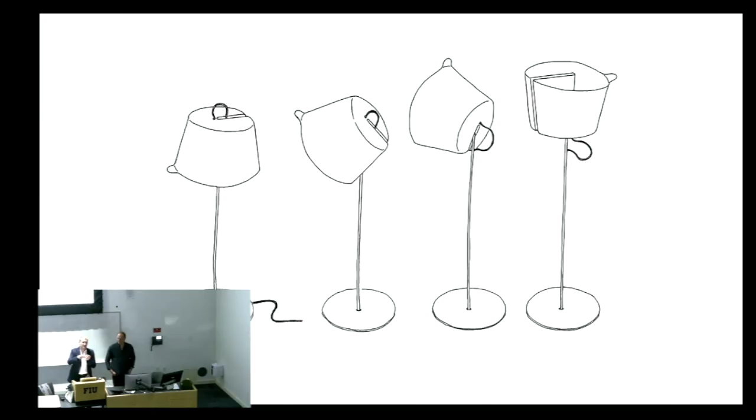And then I ended up thinking that actually that movement could be the one of a lamp, and that maybe I could go from direct lamp, directional lamp, to indirect lamp. And I designed this, which became the lamp. It's the same, except it's the first lamp ever that has the bulbs attached to the lampshade and not to the stand. All the other lamps, the bulbs were attached to the stand. Here they're attached to the lampshade, so they move along. The lampshade has a slot that allows it to move from one position to the other.

This is at Artemide, and we've sold about 3 million of them over the last 20 years. And it's nothing, it's just an archetypal lamp. But the movement of it, the way you prehend it, the way you grasp it, is kind of intuitive, new, and yet obvious. In all the projects I showed you, what I try to find is this kind of thread. It can be spectacular, but it's nonetheless always rooted.

And I think that comes from the observation of things as if you were fresh, like a kid, always joyfully discovering things as if it was your first toy, wondering what you're going to do with it. And that freshness communicates - people embrace it easily. I think that's the kind of thing you want to crack in a subject.

Hello again. So on this question, my answer would be that yes, you're right to address it because it is super important. In this room, I don't know how many are going to graduate in architecture and want to be a practitioner, an architect. But if you want to avoid the frustration of saying, 'Oh, I have a super good idea, but my friend sold it better than me and he got the job,' this is very frustrating.